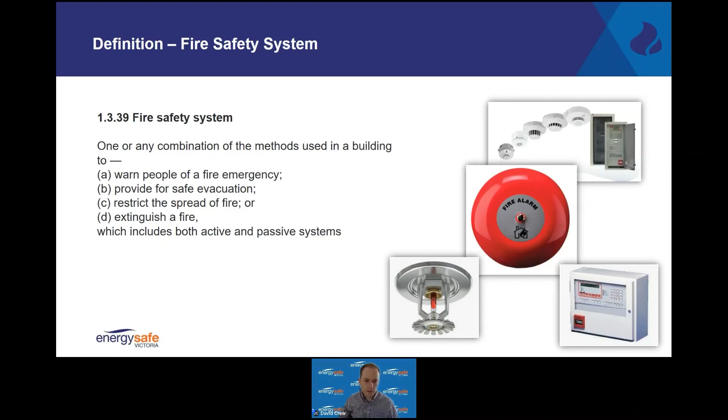Firstly, a definition has now been included in AS NZS 5601 Part 1 for fire safety system. This was included as a result of changes to the requirements around multi-layer pipe, which will be discussed in further detail later in this video. This definition was provided with the assistance of the Australian Building Codes Board.

A new definition in clause 1.3.65 for ignition source has been included in AS NZS 5601 Part 1. Ignition sources include, but are not limited to, flames, incandescent material, electric sparks, hot surfaces, and mechanical impacts.

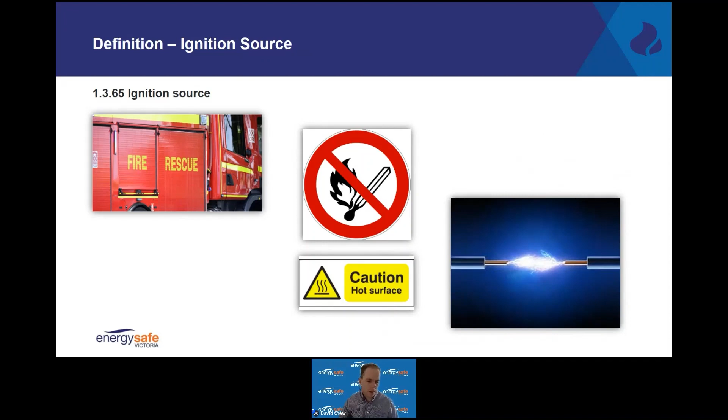Section 2 of the new standard has now been split into two different sections, one being for essential safety requirements and the other being performance-based design requirements. This has been done to prevent confusion around the two separate types of requirements in Section 2. Essential safety requirements is first in Section 2, followed by performance-based design requirements.

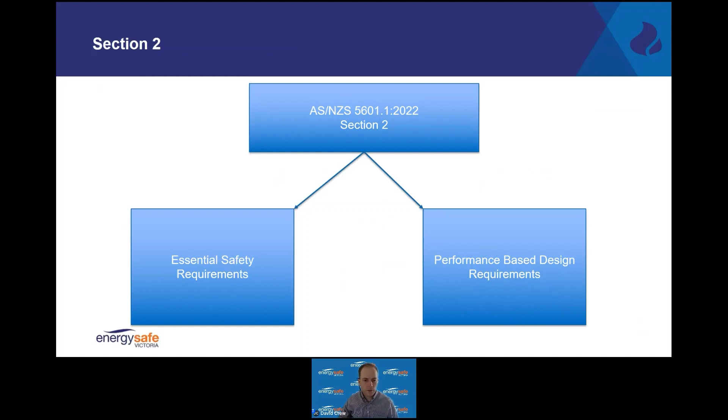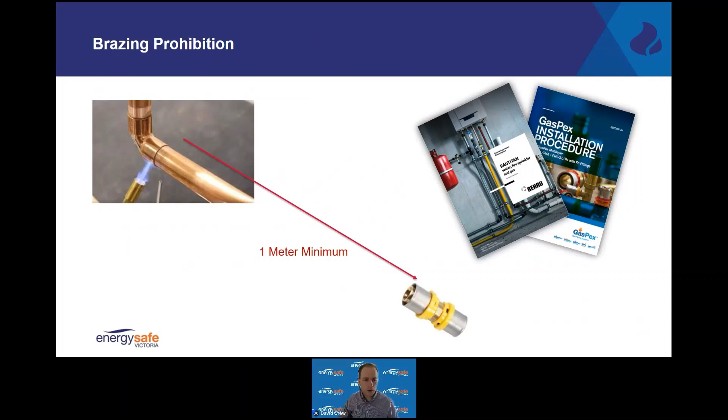Brazing will now be prohibited within 1 metre of a joint with non-metallic components installed. It is important to note that there may be specific requirements that manufacturers also require when brazing or silver soldering is being carried out. Clause 5.2.12 now includes the prohibition of brazing or silver soldering within 1 metre from non-metallic components.

Changes have been made to the requirements for installing pipes in wooden joists or metal frame walls. Previously, there were limited requirements in relation to this issue, but following consultation with AS NZS 3500 series of standards, a similar requirement has now been made in the new AS NZS 5601 Part 1. There have been figures included to help explain the requirements for both wood and steel frames. The requirements in clause 5.3.14 state the location and maximum size of holes to be drilled when installing fitting lines.

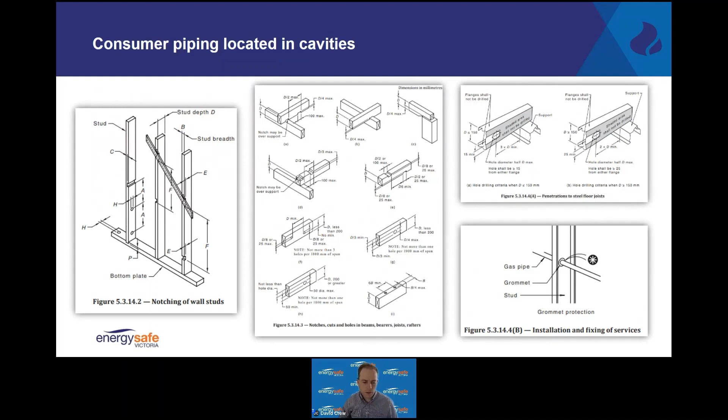Prohibition on the installation of multi-layer pipe above ground external to buildings. Clause 5.3.16 will now prohibit the use of multi-layer pipe being installed above ground outside a building. For example, if a multi-layer pipe was to be installed to a meter location and the multi-layer pipe was planned to be protected from UV, this would now be considered non-compliant to the new standard.

The AG6 committee responsible for 5601 has received considerable feedback on this issue from both manufacturers and consumers to come to this decision. It is also worth noting that permanent joints are required anytime a join in a fitting line is completed in an inaccessible location, for example, in a cavity wall.

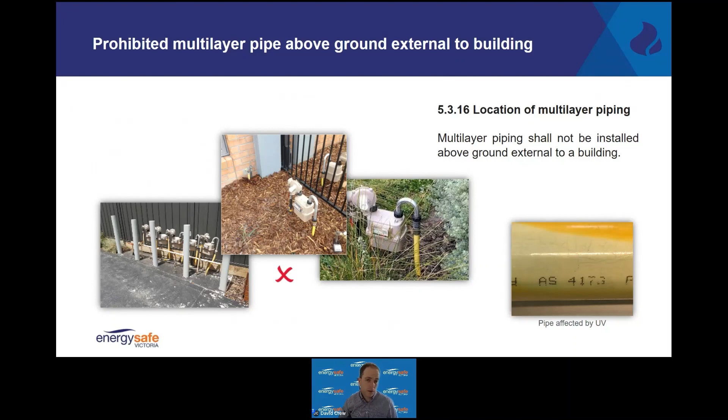Clause 5.2.11 now requires the use of specific isolation devices to be installed if there is multi-layer pipe installed within a building. This clause states that if a multi-layer pipe has been installed, the installation shall be fitted with a system that will shut off the gas supply when the fire safety system operates.

We've previously discussed what a fire safety system and the new definition that has been included in AS NZS 5601 Part 1. The isolation valve installed must be a Class 1 safety shutoff valve and installed and be located prior to any multi-layer pipe and be as close as practicable to the gas supply point or gas meter.

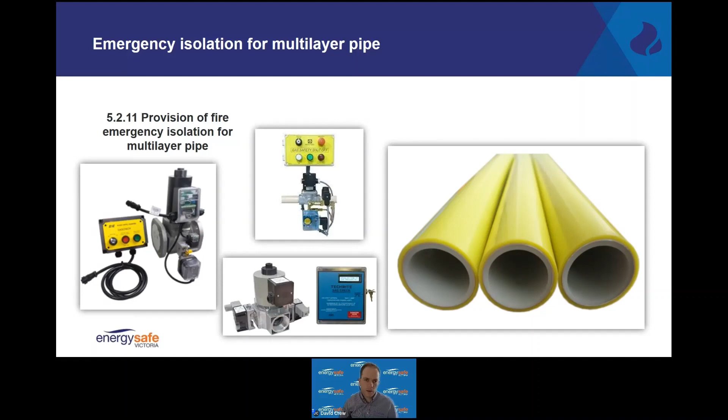Alternatively, for Class 1A buildings, for example, a standalone house as defined in the NCC, when no fire safety system has been installed and the volume of the fitting line is less than 30 litres, a device that automatically shuts off the gas supply if gas tightness, for example a leak, is adversely affected by a fire emergency event shall be provided. The same location requirements will apply as previously discussed.

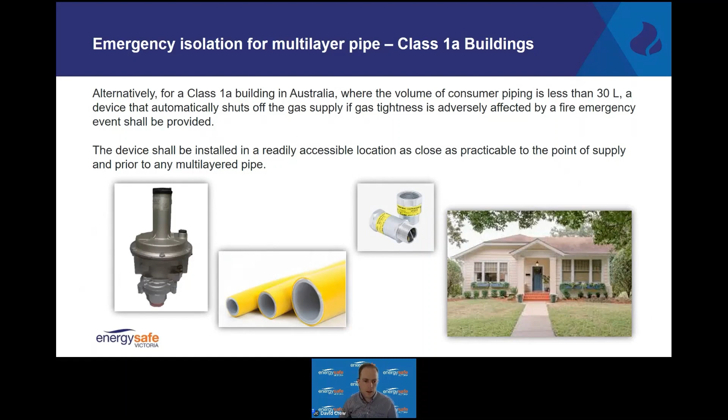There are now increased clearance requirements between domestic cooking appliances and range hoods to align with IEC 60335-2-31, household and similar electrical appliances. The requirements in clause 6.10.1.1 change from 600 millimetres currently to 650 millimetres for clearances to range hoods. This revised clearance brings the standard in line with other jurisdictions around the world.

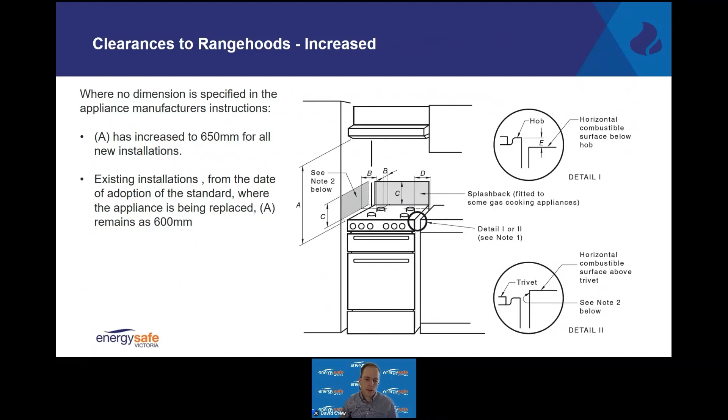Clause 6.6.1 now prohibits the use of semi-rigid connectors for the installation of commercial catering equipment, unless in the case of semi-rigid stainless steel connectors it forms part of a certified hose assembly, or in the case of a semi-rigid connector, forms part of a certified appliance. That means it has been approved as part of an appliance. Multi-layer pipe will also be prohibited within 1 metre of the nearest part of the appliance, and the final connection must be made in either copper, steel, or a certified hose assembly.

Semi-rigid connectors are approved for 30 movements, whereas hose assemblies are required to be approved for 7,500 movements.

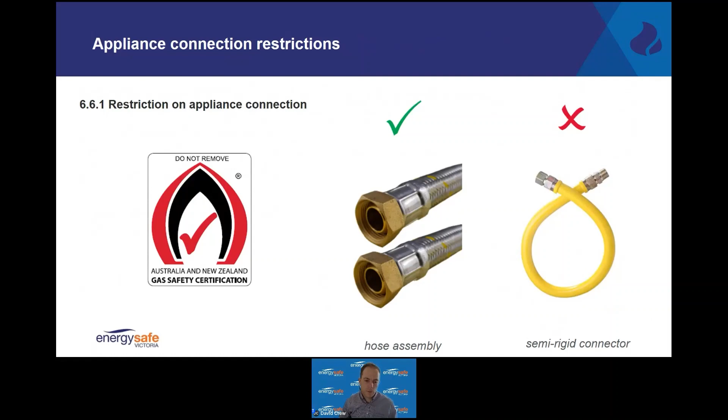Extensive testing has been undertaken around the requirements for protection of combustible materials. Table C.2.2 now requires a minimum 15 millimetre thickness for the protection of combustible materials around commercial catering equipment, and you can find more information regarding this requirement in Appendix C of the new standard.

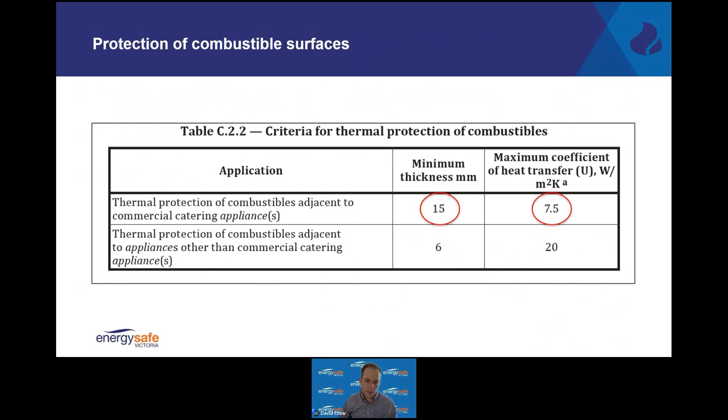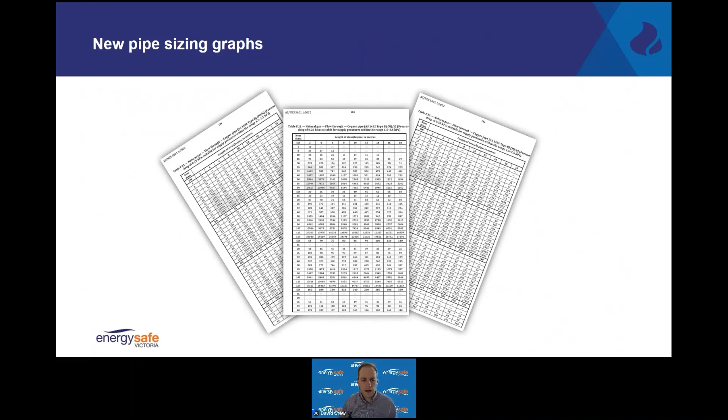New pipe sizing graphs and tables have been included in Appendix F, based upon the Churchill friction factor equation rather than the National Fuel Gas Code. These tables are less constrictive for complex gas installations where there are long pipe runs and large diameter piping, and are more in keeping with the flow capacities of the previous 2004 standard. ESV in the future will be putting information on its website to assist in pipe sizing.

Appendix K has been revised to include the effect of altitude on gas supply pressure for high-rise building installations. It is important to remember the effect of gas pressures and how it is affected by the height of a structure. Compensation needs to be allowed for. A general rule of thumb is that for natural gas, the pressure will increase by approximately 0.5 kPa for every 100 metres rise in the building.

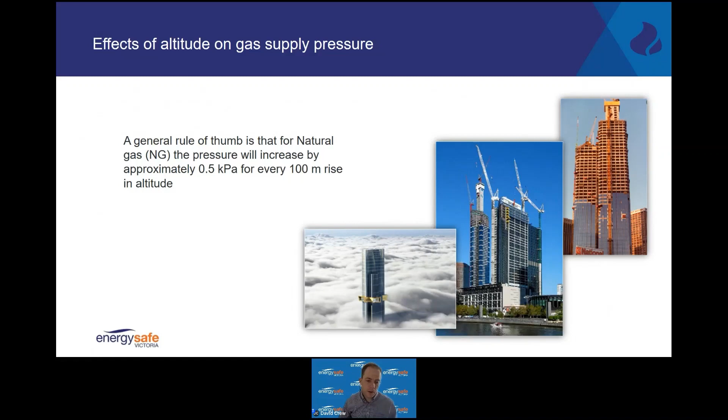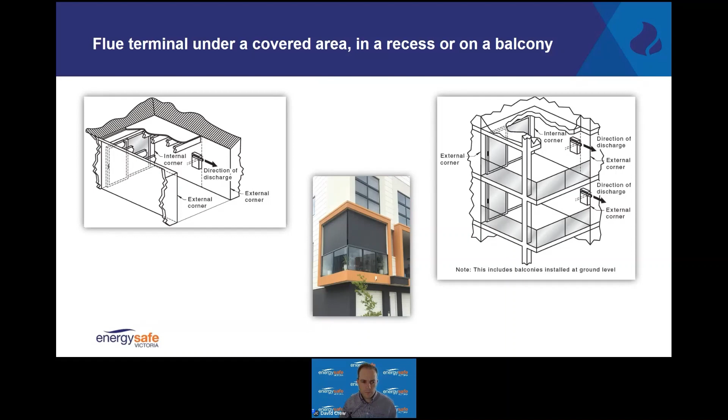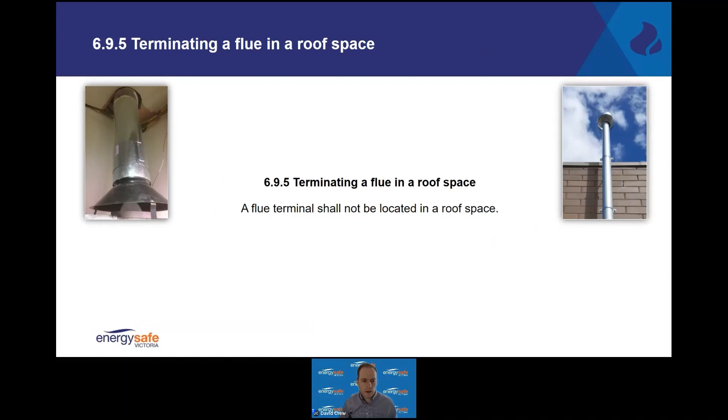Clause 6.9.4 now has revised requirements for the location of flue terminals under a covered area, in a recess, or on a balcony. Flue terminals will now be required to extend beyond the external corner of the covered area and discharge towards an open area, as depicted in the diagrams on our screen. Additionally, flue terminals under any circumstances shall not be located in roof spaces. This requirement now brings Australia in line with requirements in New Zealand.

Clause 5.2.9.2 will now require that where more than one commercial catering appliance is to be installed in a kitchen, either of the following shall apply. A single quarter turn manual shutoff valve shall be installed to isolate all appliances, and the manual shutoff valve shall be readily accessible and clearly identified. Or, a readily accessible emergency stop button, which is clearly identified by a sign, shall be connected to an electrically operated valve with a key operated reset function to ensure no gas flows to the installation after the restoration of power following a power failure.

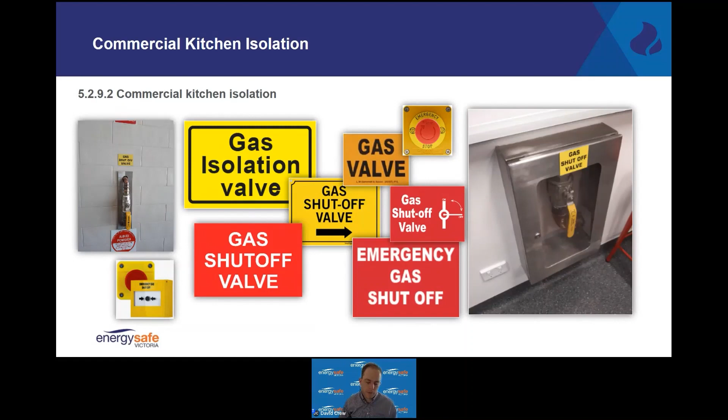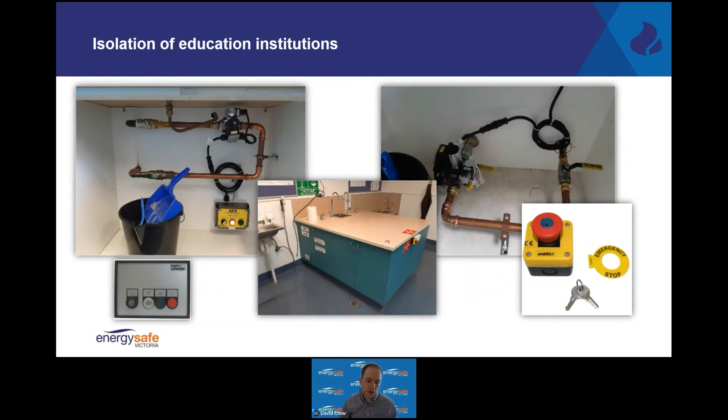There are new requirements for the isolation of installations in educational institutions. Clause 5.2.9.1 now requires installations to have a readily accessible quarter-turn manual isolation valve, a solenoid connected to a timing device set to the duration the installation is expected to operate, a readily accessible emergency stop button, signage adjacent to the emergency stop button indicating its purpose, operating instructions for the emergency stop button, and the system shall require pressure proving of the downstream installation prior to restoration of the gas supply.

There are now specific requirements for the connection of freestanding commercial catering equipment using a hose assembly. Clause 6.10.2.7 will now require the hose assembly to hang in a U-shape. Hose assemblies are required to be either Class B or D. Means to prevent damage to the hose and assembly will now also be required. ESV sees a high level of non-compliance in this area, which initiated a change to the standards. In the future, we will be looking to include this issue in our zero tolerance policy.

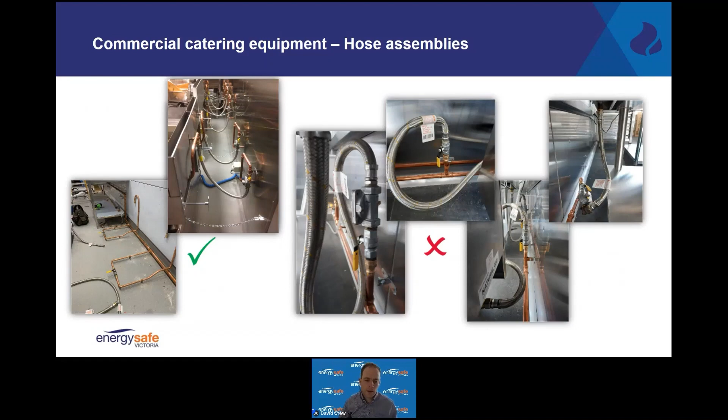New requirements have also been introduced for freestanding commercial catering equipment with an under equipment connection. Clause 6.10.1.10 will now specifically prohibit the connection being made by a hose assembly or semi-rigid connector.

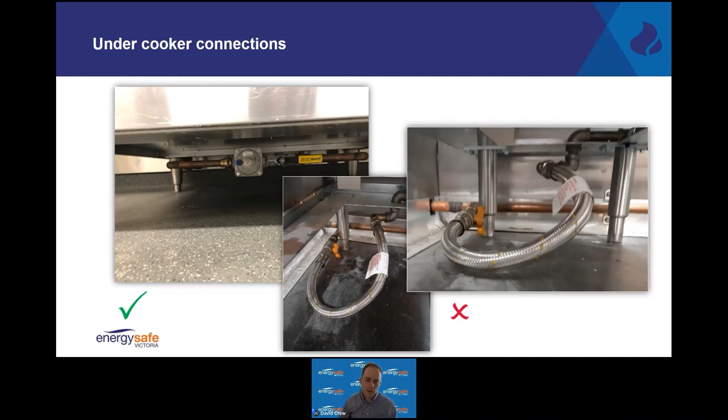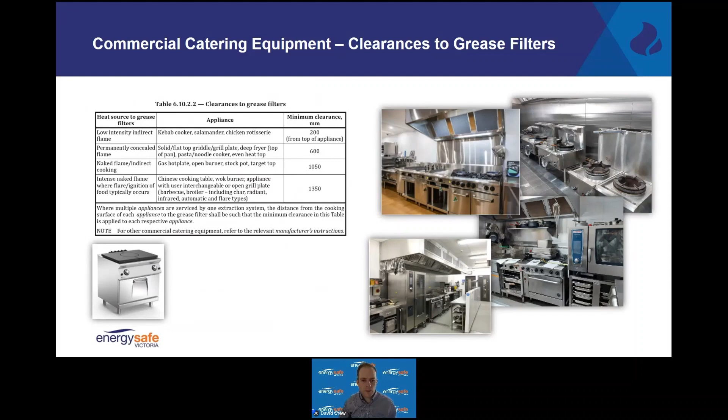Clause 6.10.2.2 has been changed to include more appliance descriptions, and some distances for certain appliances have been changed, as can be seen on our screens in Table 6.10.2.2. AS NZS 5601, Clause 6.10.2.2 is not limited to grease filters located directly above the commercial catering appliance, but rather incorporates any part of any grease filter which is within the maximum required exclusion area, as depicted by the picture on your screen.

A reminder that this clause forms part of ESV's zero tolerance policy when inspecting or approving commercial kitchen installations.

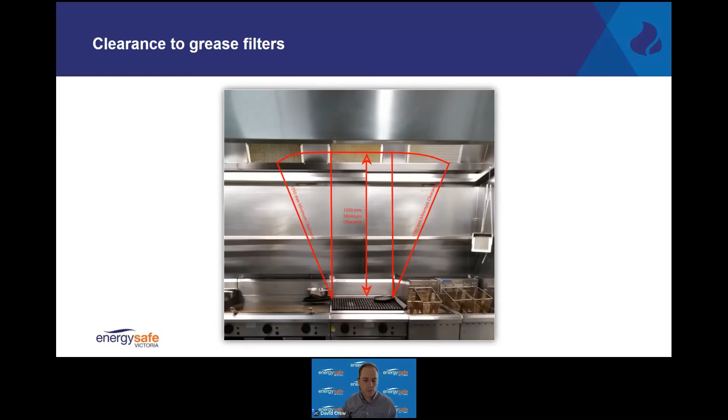As detailed in this presentation, there are substantial changes from the 2013 edition of AS NZS 5601 Part 1, and therefore all gas fitters are encouraged to purchase a copy of the newest AS NZS 5601 Part 1 2022 edition standard. Standards can be purchased from the Standards Australia store or on the SAI Global Info Store, which links are available on both their websites. That concludes our presentation on the changes to AS NZS 5601.